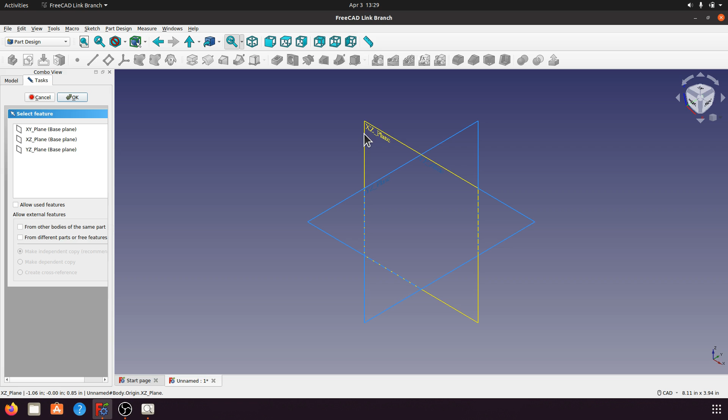Now for the base, create this first. So go to part design, create sketch, and then create this. We can choose XZ plane.

Okay, now we can create rectangle. For the dimension, 1.12 to 1.50. Okay, click this 3 point for symmetry.

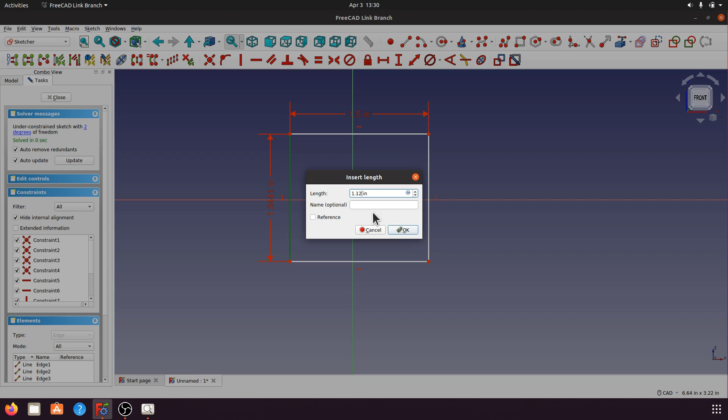Let's undo first. Create dimension first, 1.5. Okay, let's take a look again, 1.12, 1.12 inch. Okay, now create this symmetry.

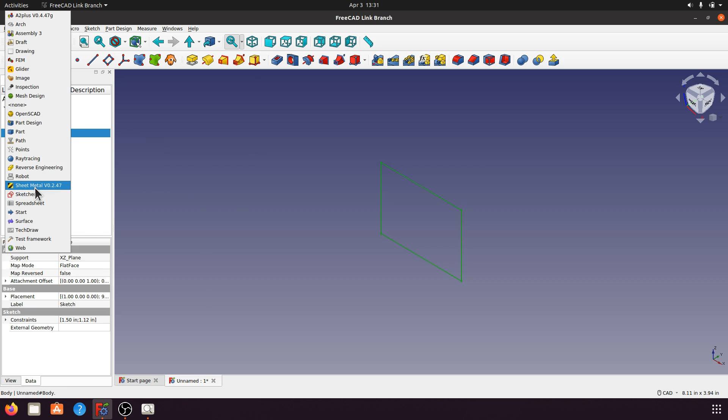Okay, now sketch fully constrained. Now we can close. So click the sketch. Let's go to the sheetmetal workbench and then create base sheet metal.

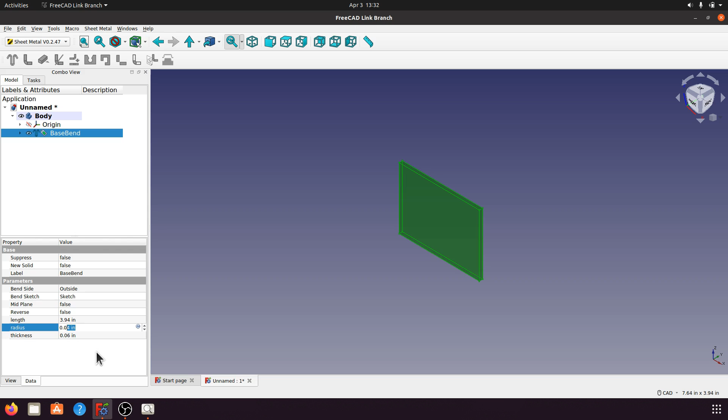For the thickness, 0.06. Okay, and the thickness 0.06. Radius, let's try 0.06. Okay.

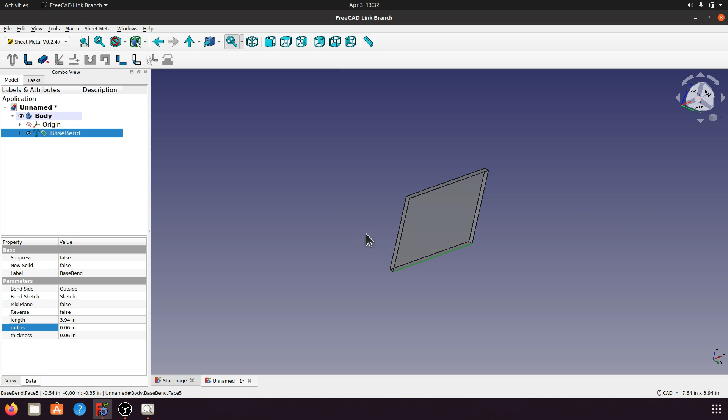Now for the second bend, we can create this bending for the length of 1 inch. Okay, create this edge and then create bending for length 1 inch.

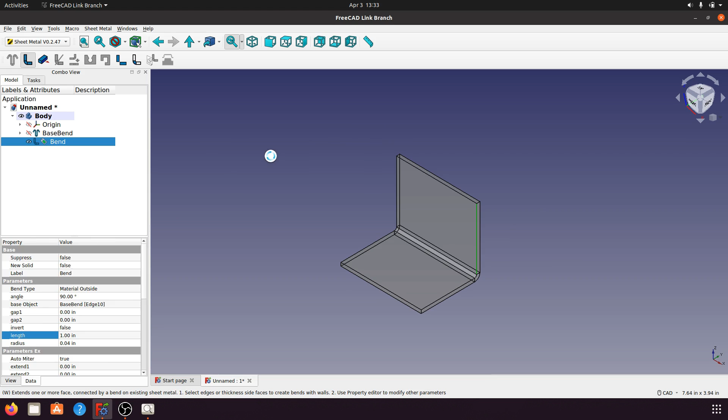Okay, and then for another bending for the length of 2.43 and degree 32. Now go to this edge and then create bend for the degree, let's try 32. Okay, and the length 2.43. Let's check again. Yes.

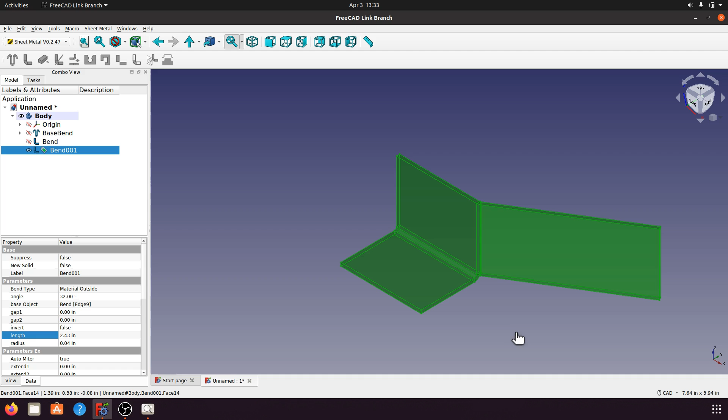Okay, now let's take a look. Okay, I think it's good. So now we can create a pocket.

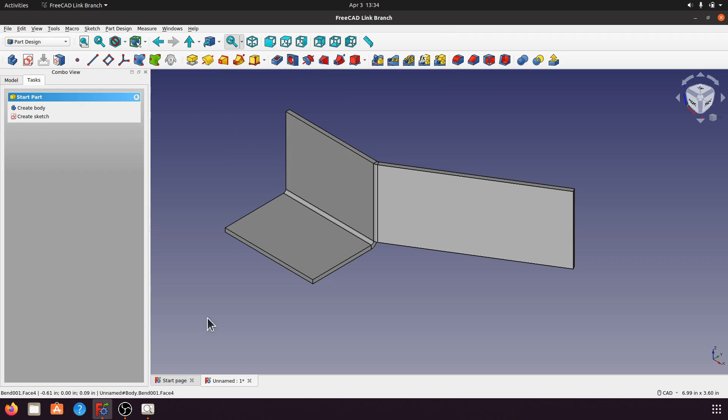So let's go to part design and then can create fillet for radius 0.62. So click this edge for radius 0.62.

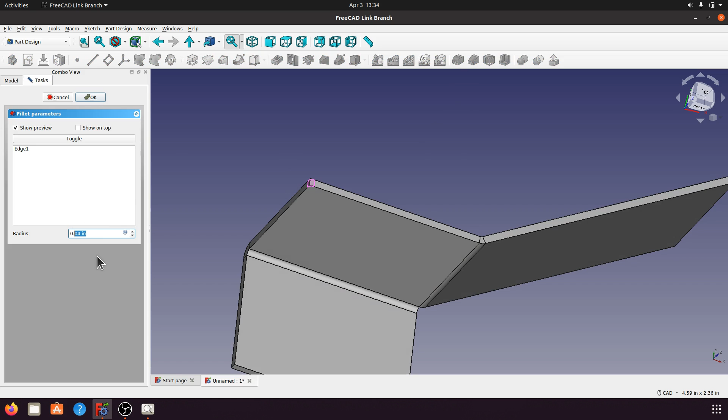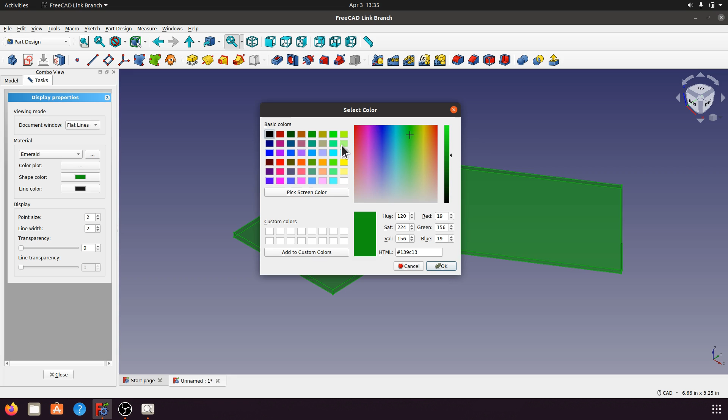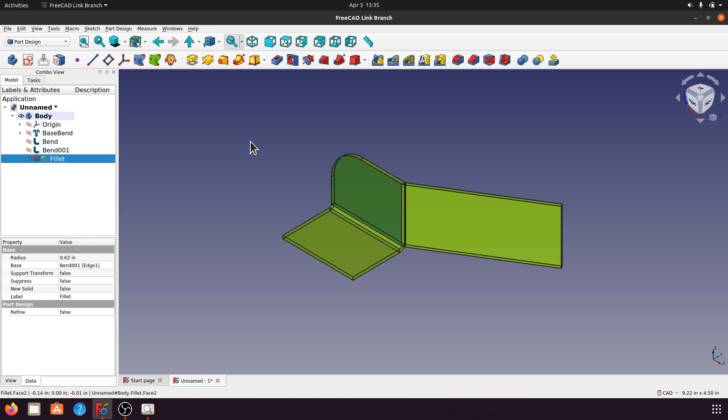Okay, now click this face for create a pocket circle. Can click the sketch and create circle, and then let's take a look for the position.

Okay, this 0.5 and then this 1 inch. Okay.

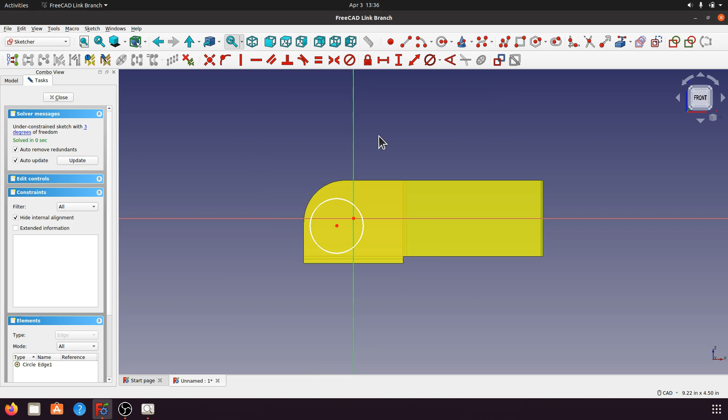So the position, let's analyze from this top. So I think for the 1.12 with the 0.06, so 0.56. So I think this is the same with the axis.

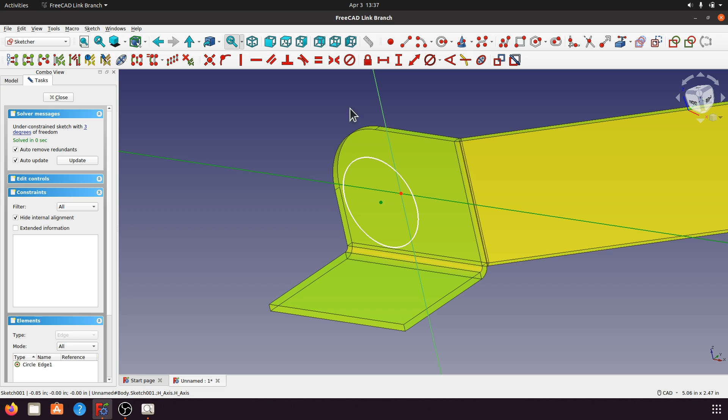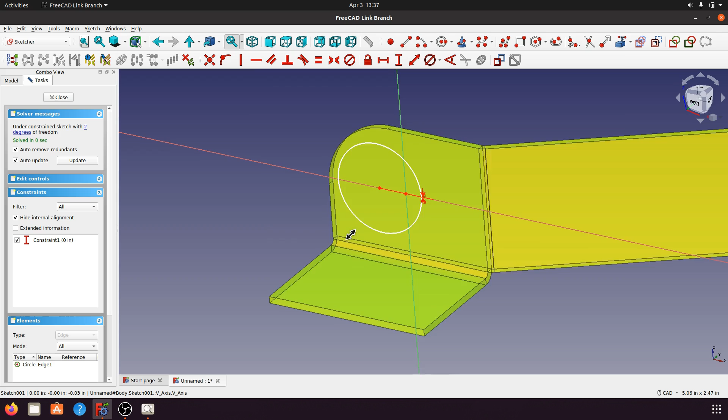Now for the distance of 0. Okay, now center. This 1 inch, so from 1.50 this will be 0.5 inch.

Okay, now create this external geometry and then create this point with this line for 0.5. Okay.

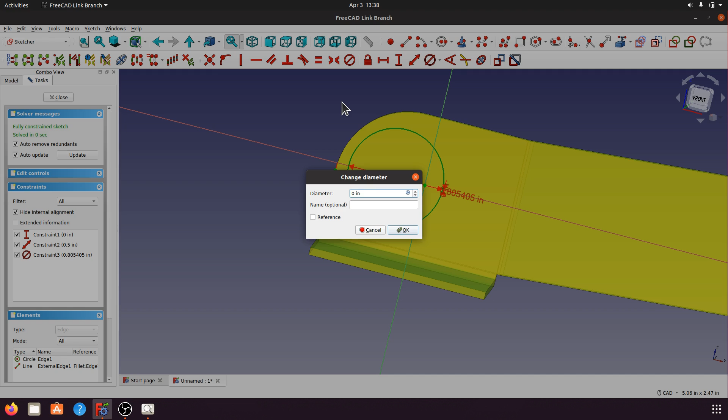Now the diameter of the circle, 0.62. Okay, 0.62 for diameter. Okay, now let's arrange this dimension.

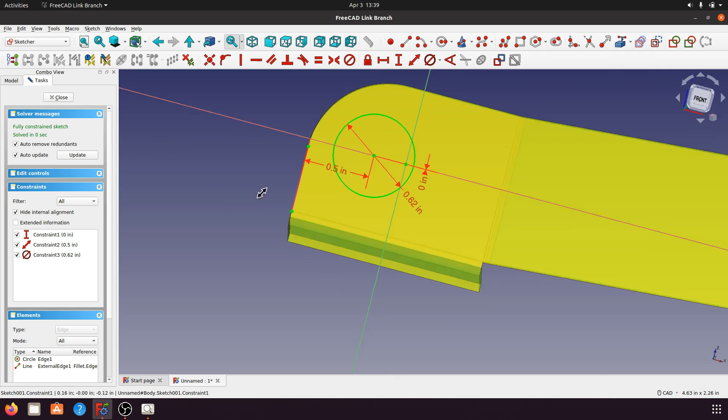Okay, now let's close the sketch. It's already fully constrained. Now we can create pocket with the thickness same with the plate. Okay, click OK.

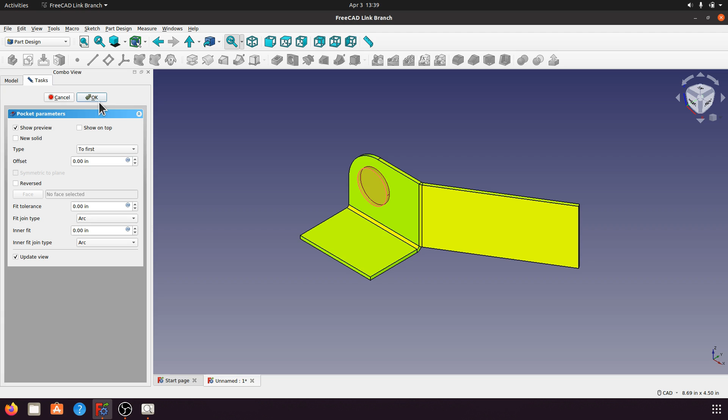Now for the first pocket already created, now we can create the second pocket using slot. Now click this face, create sketch, and then create slot, and then create external geometry.

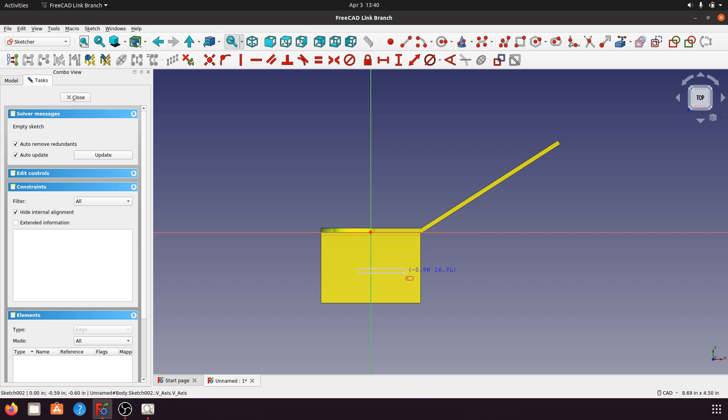Okay, now click this point and this line. For dimension, 1 inch.

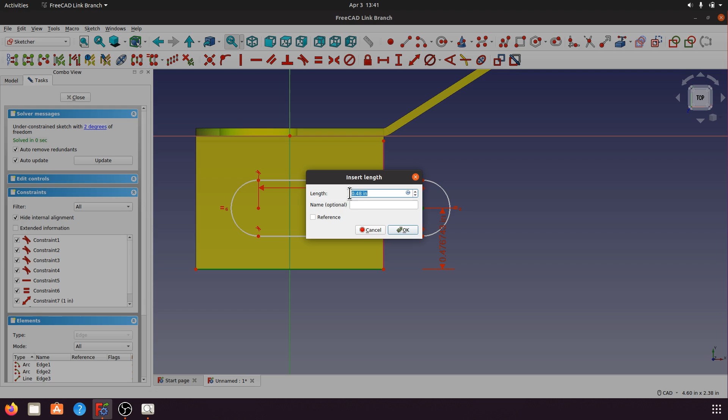Okay, now let's take a look for the position, 0.5. Click this point and this point. Let's try. No, this point. Maybe we can create another external geometry, then create distance, this line and this point. Okay, for the 0.5 inch.

Okay, now for the y or radius 0.21. Okay, now create radius 0.21. Okay, now let's take a look.

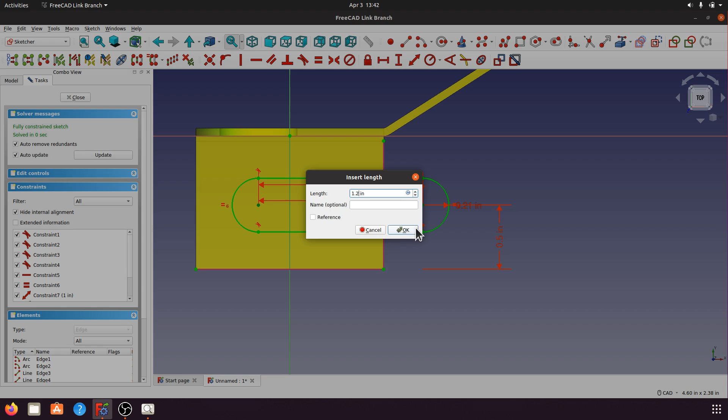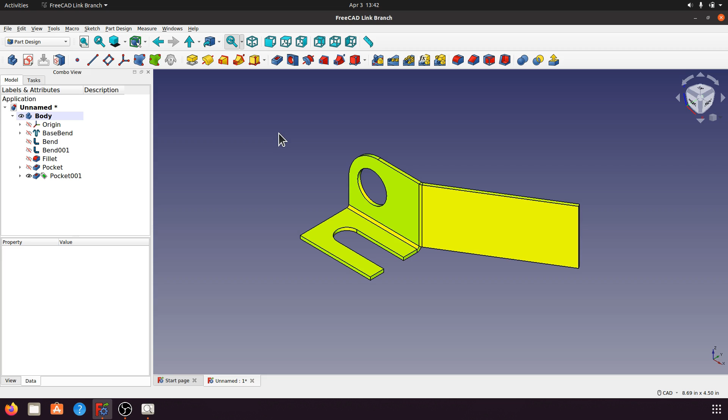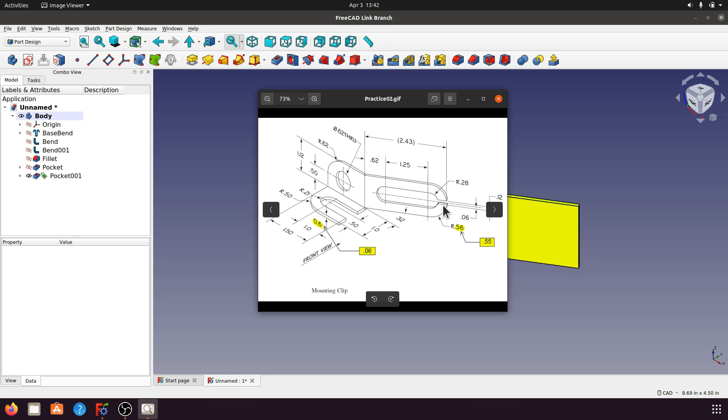Now for the last pocket, let's create again the same slot with another through cut here. Now click the sketch and then click this face and create the sketch. Now create the slot. Okay, now for the position.

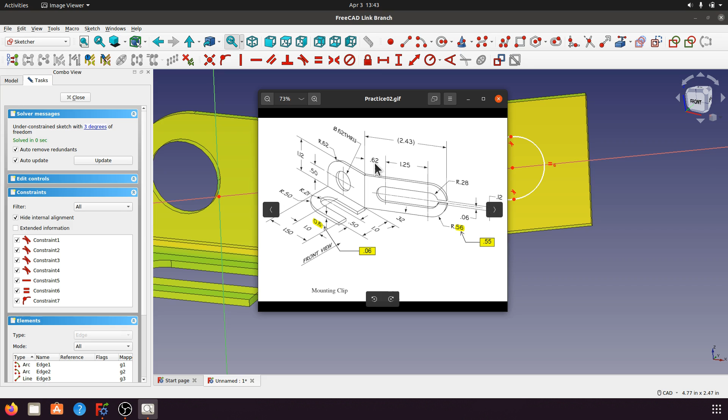0.62. Okay, let's try maybe 2.43 minus 0.62 minus 1.25.

It's about 2.43 minus 0.62 minus 1.25, about 0.56, so this is the dimension 0.56.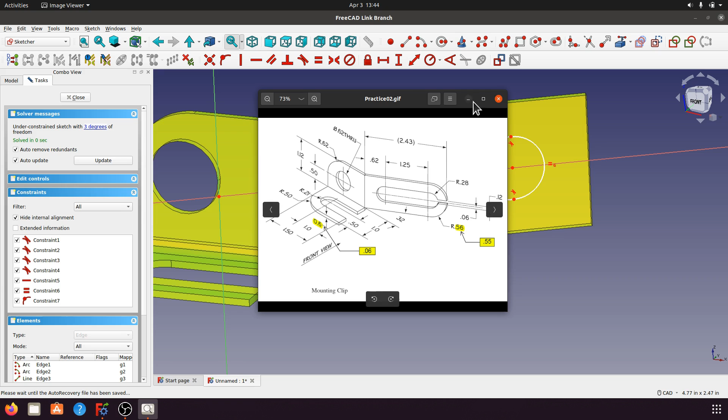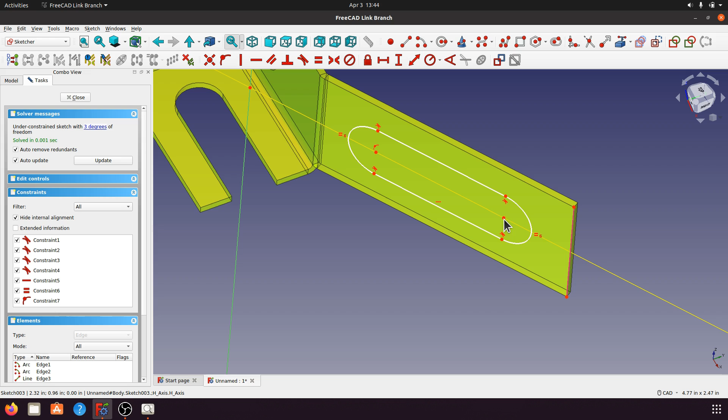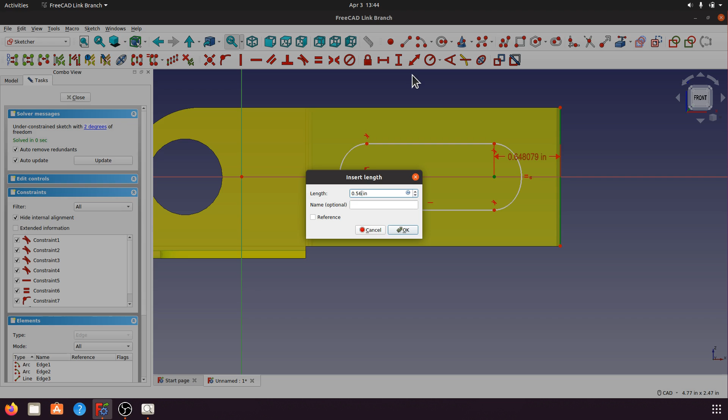So I will create external geometry with the point and this line distance, okay, 0.56, okay, and the radius 0.28, radius 0.28, okay.

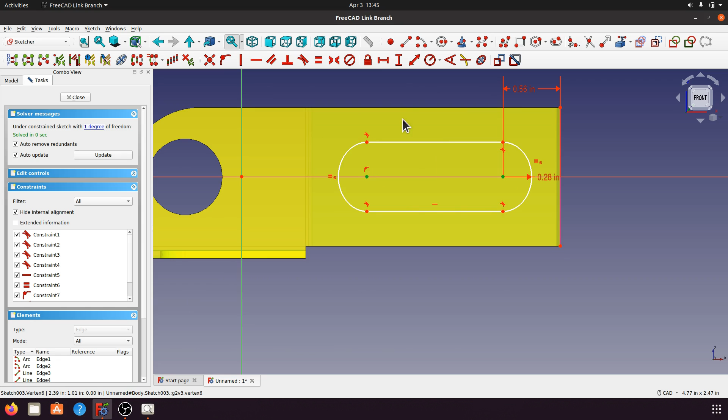1 degree, this distance between center 1.25, okay.

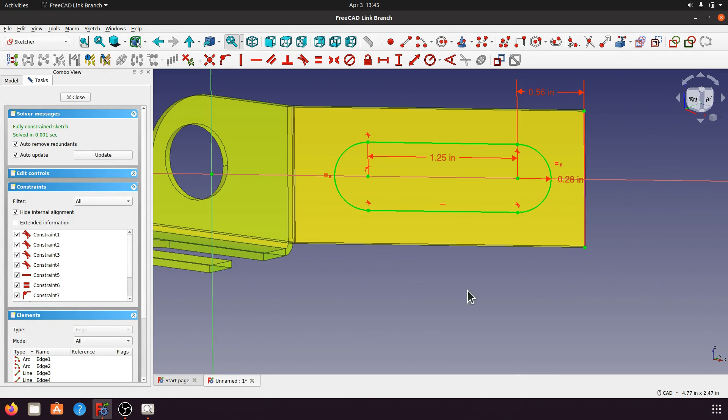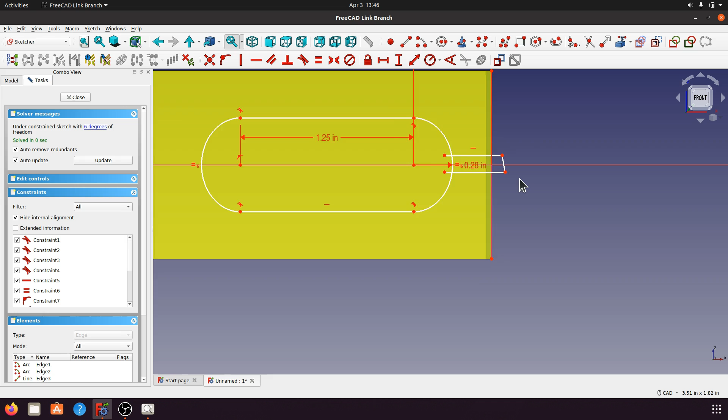Okay, now can create the through cut. Using this line. Okay, now create this for vertical and then click this point and this point and the axis for symmetry.

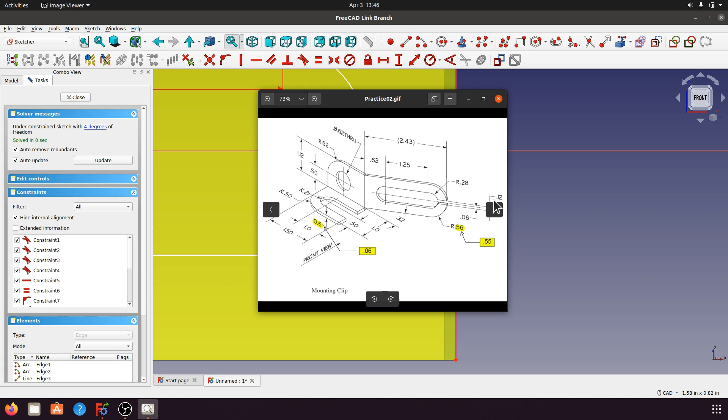And then this width of cut, 0.12, so this line dimension for 0.12, okay. Now we can cut this line and this radius, okay.

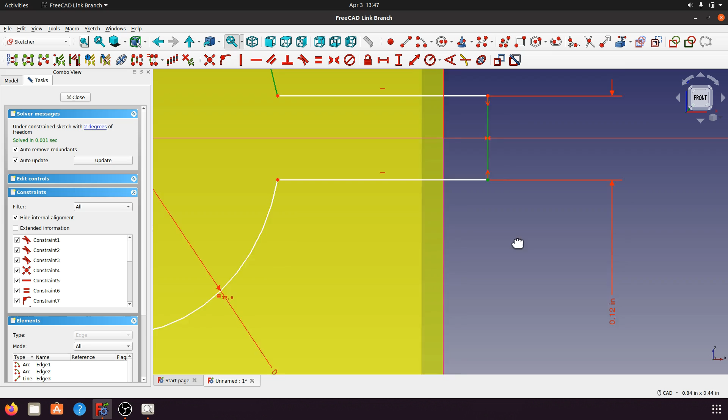So this radius 0.28, okay. This line with this point. Okay, this point and this point, this point and this point.

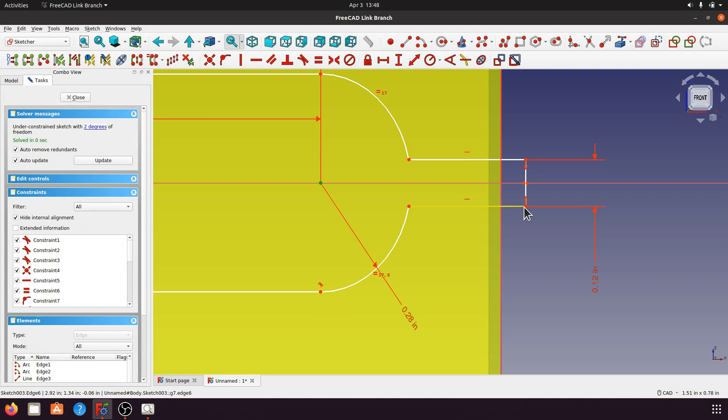For dimension, let's say 0.64. Okay, try again with this point and this point. This line, this line, okay, same.

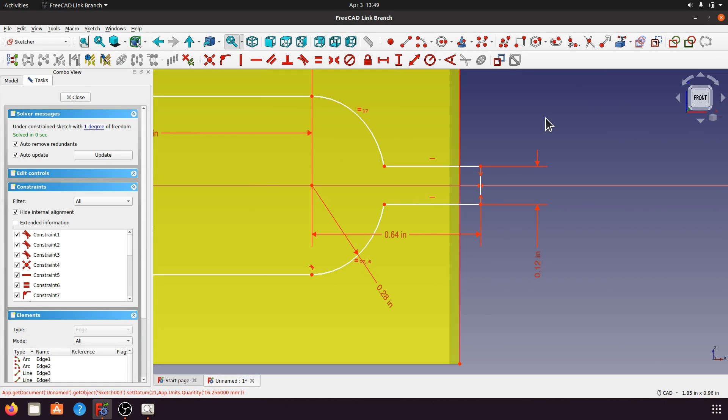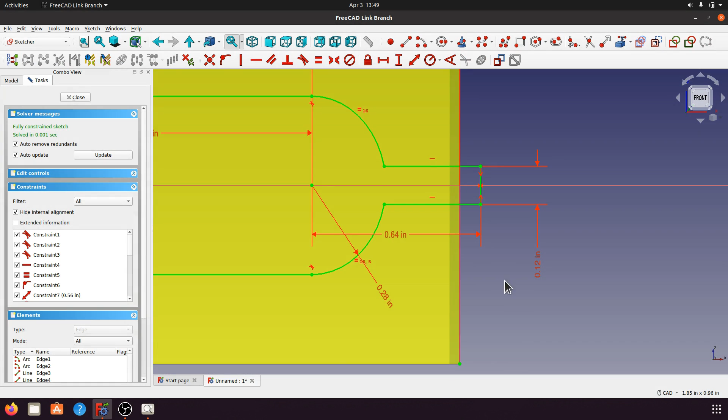Error. So let's check again for the 1 degree. Maybe this arcus and the line for tangent. Okay, so now created.

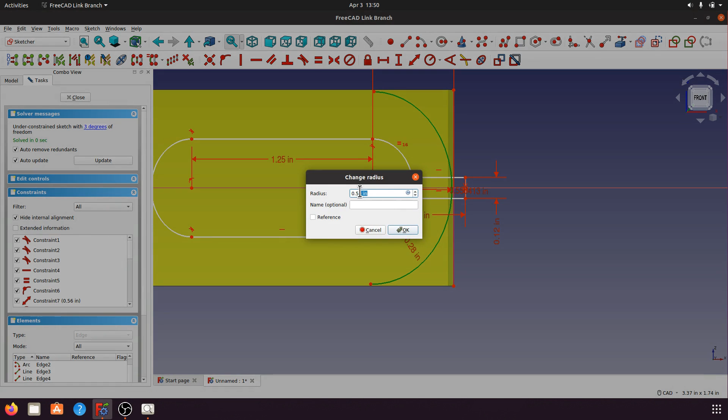Radius here. For radius 0.56. Now create arcus. For radius 6. Okay.

Now click this point with the center for 0 inch and this point with the this point with this center for, okay, so this point with this point, 0. Okay.

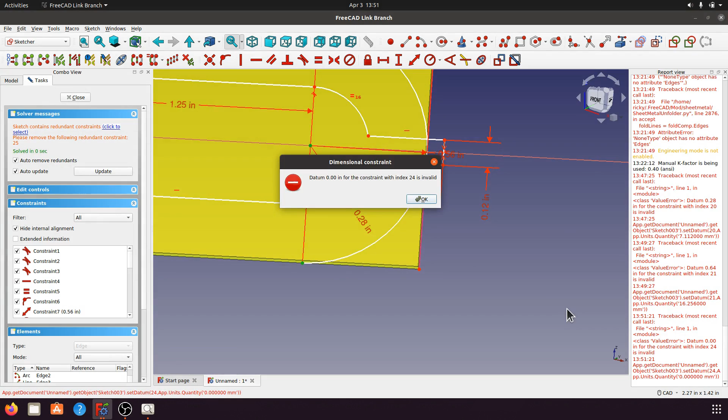So now create polyline. Okay.

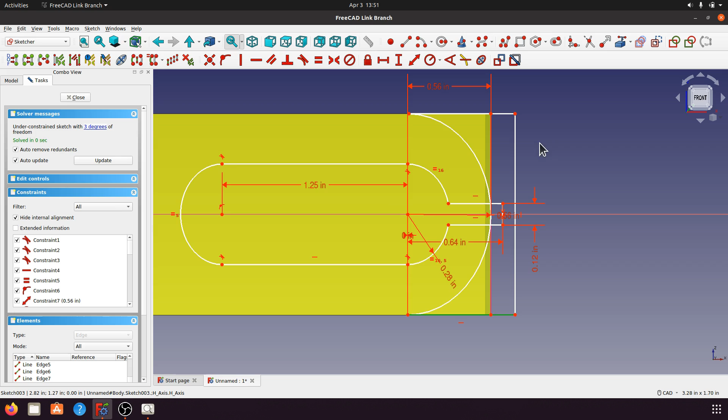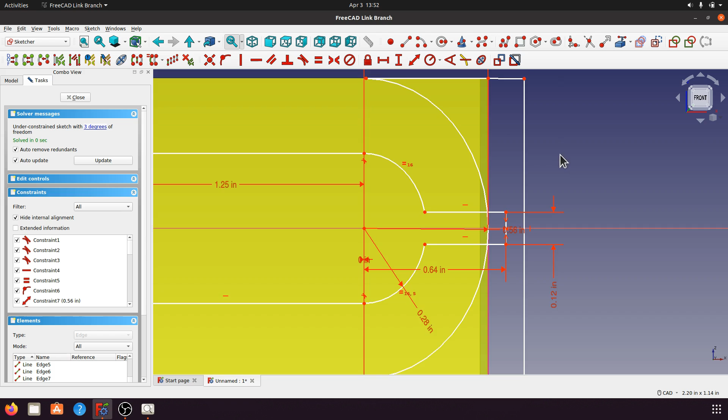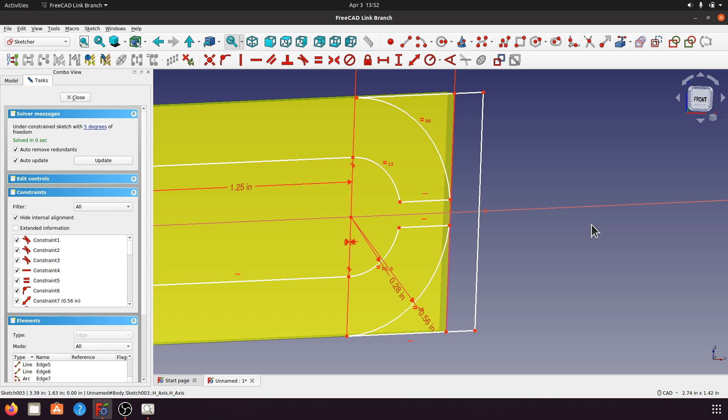So let's check for the degree. Okay, now click this point and this point for the dimension for degree, and then click this arcus with the line for tangent. Okay, click again this line for with arcus for tangent.

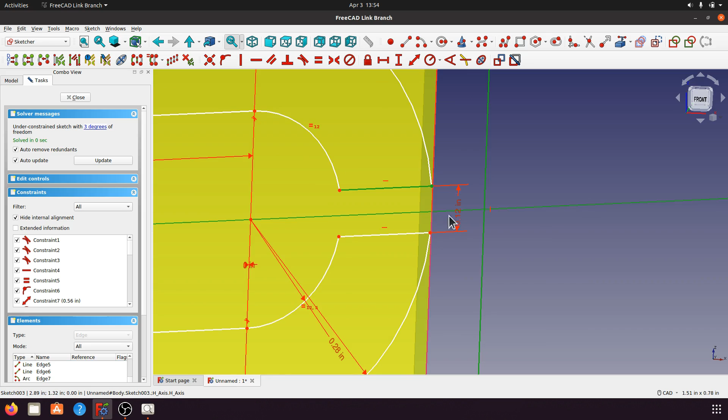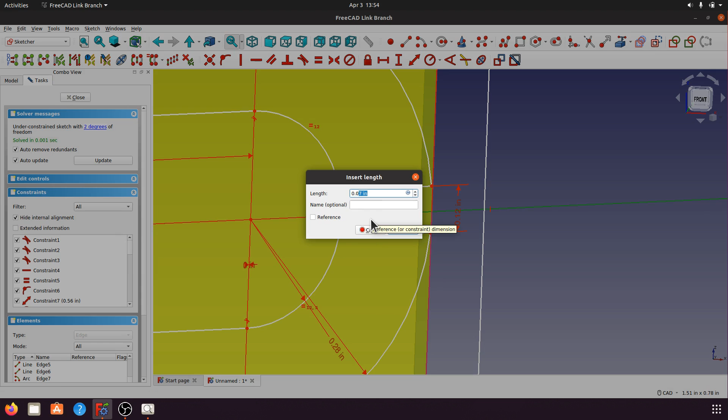Okay, things still 3 degrees. Let's check again. Okay, now this point with this axis, point with this axis, 0.06. Okay, 2 degree.

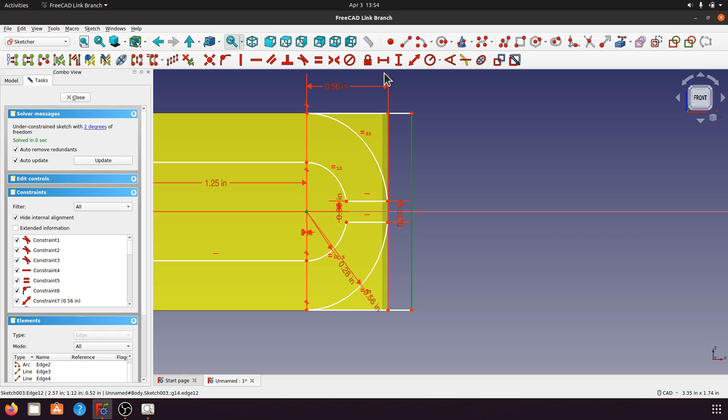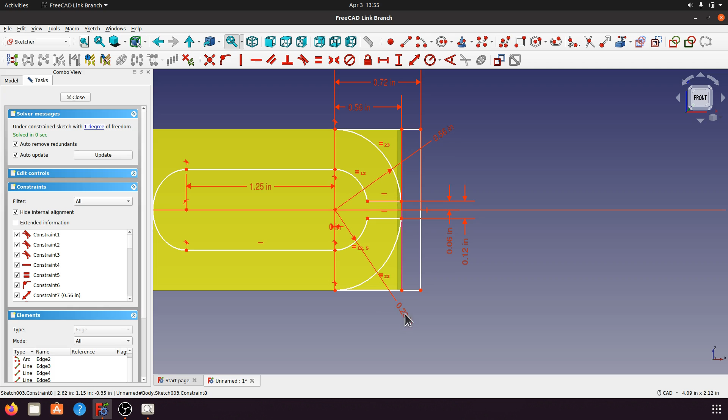Now this line with this point for dimension. Okay, now last degree of freedom. Let's check. Okay, now click this line for horizontal.

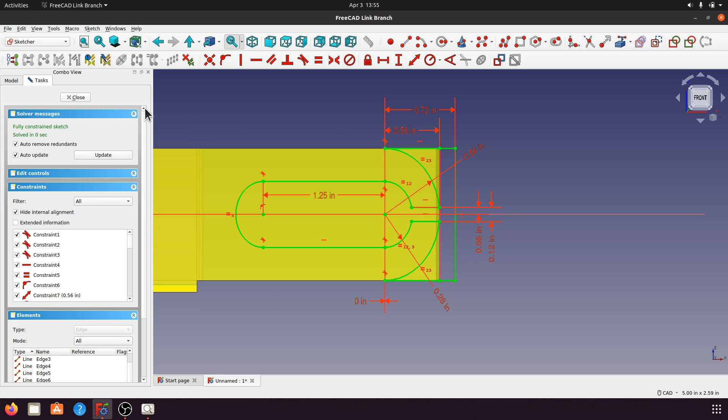Okay, now the cutting sketch already green, we can close the sketch. Okay, now we can cut for the pocket with the same thickness. Okay, now let's click OK.

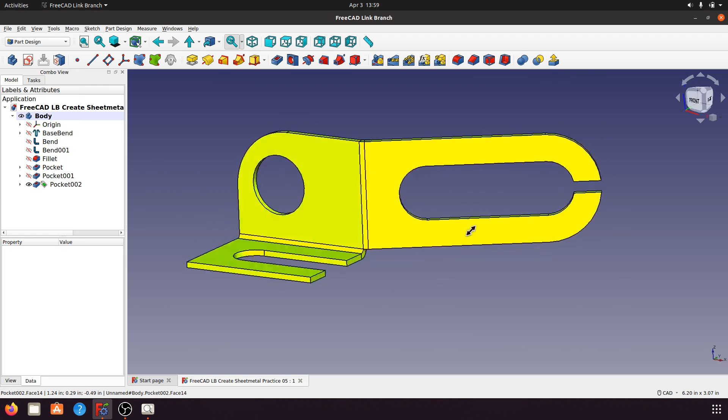Okay, now we go to the flatten fold. So we can go to sheetmetal workbench and then click for the base plate of sheet metal and then create flatten fold. Okay, now let's click for ANSI. Let's click OK.

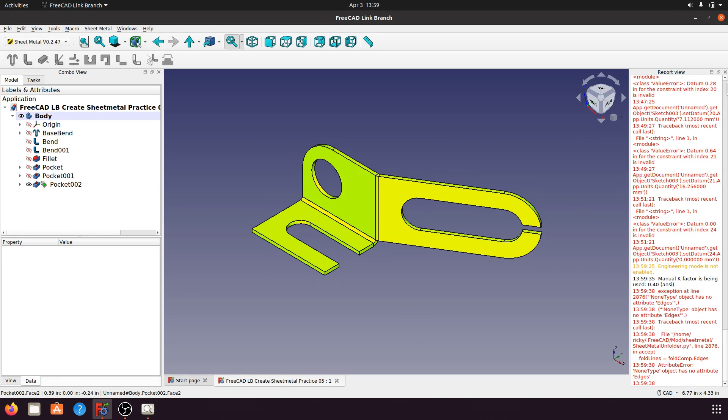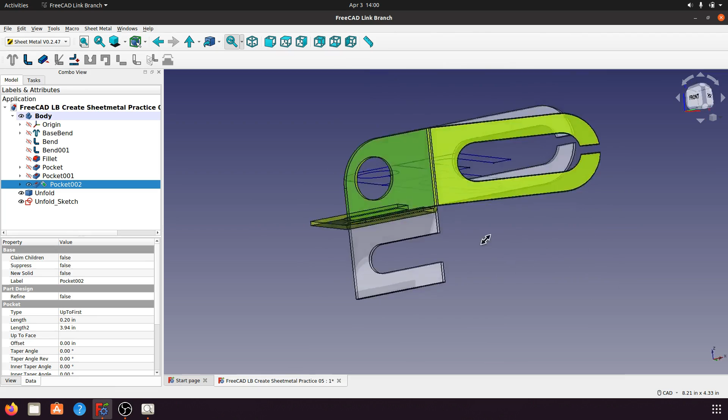Okay, let's try again. Unfold. ANSI. Okay. Now this is the unfold. I think the sketch is not the same.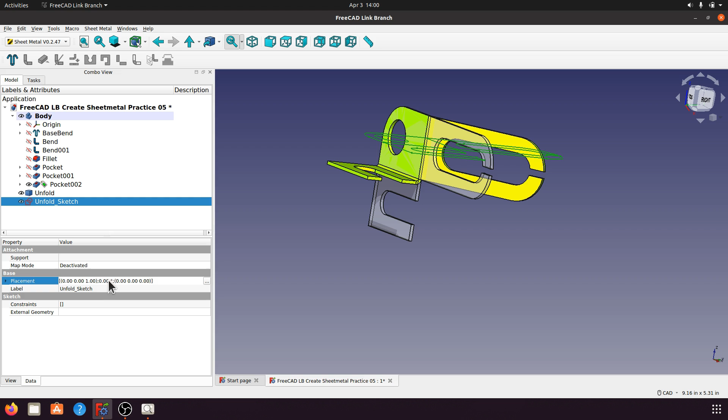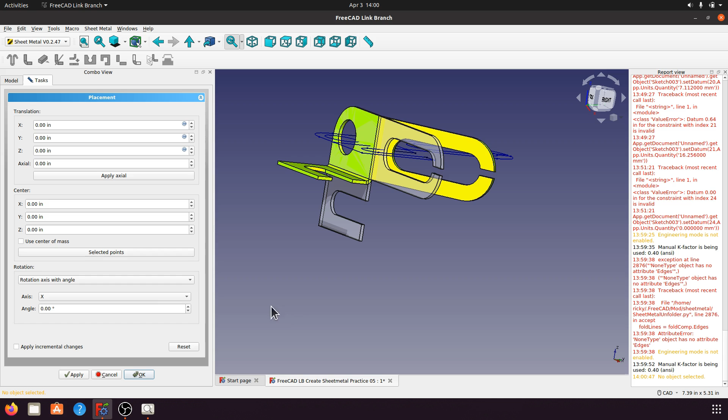Can check for the degree. Its angle rotation Y. Try again. X. No. Let's turn 90.

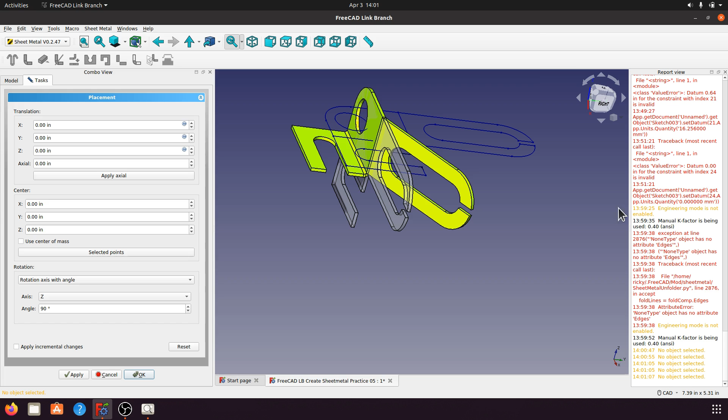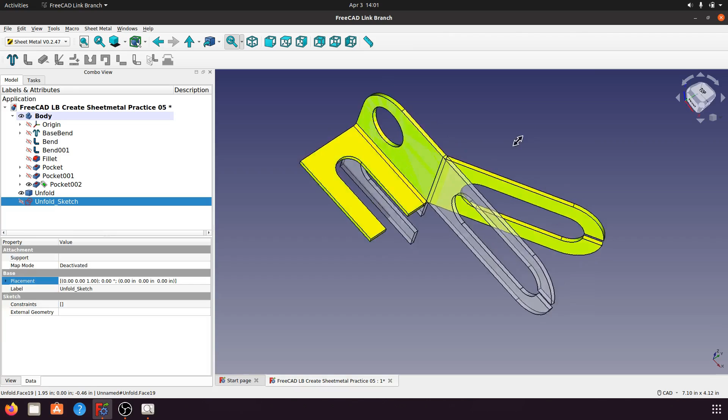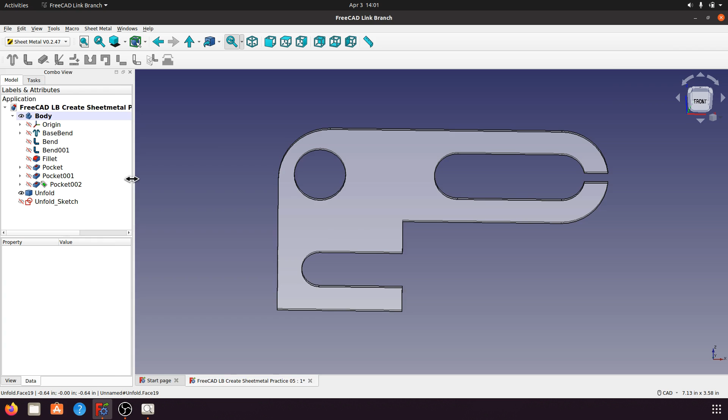We can hide first for the sketch. Unfold. Now I think this is the unfold plate. We can hide the pocket, so this is the flatten fold. Okay, so we can continue with the sheet metal and can hide this.